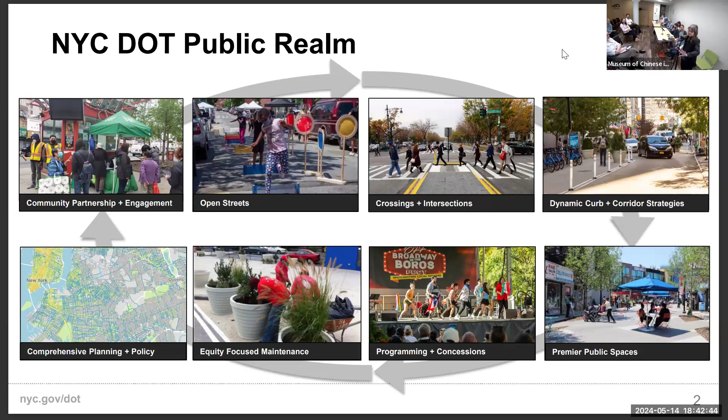Okay, sorry. Can I go like this? Okay, sorry, I need visual cues. So just to summarize, this is some of the types of projects that we work on, again, like quick one-day pop-up plazas to more permanent capitally built-out projects. If you can go to the next slide, please.

Just to review and summarize what Gigi was saying, this SIP is an expense funded project. It is with near-term materials, interim materials like gravel, delineators, etc. This is part of unifying Park Row's connection to Chinatown, but again, these are still near-term materials. Thanks, and then I'll hand it over to you, Becky.

Can I actually borrow one of the mics so that I can move? Sure. Thank you.

Hello everyone, thank you for having us today. We are excited to present our proposal for Park Row. Park Row, as you all know, is an important connector between Lower Manhattan and Chinatown. As you can see in the graphic, there are many visitors, 14 million visitors, and also a lot more in Chinatown.

25.6 million in Chinatown, and we also have a lot of visitors crossing the Brooklyn Bridge. It's very important to improve Park Row as this pedestrian and bike route connecting the different neighborhoods in the area. Another objective of this project is to facilitate easier pedestrian access to streets and amenities within the security zone. As you know, there's the Brooklyn Bridge Arches and a high school and residential buildings within the security zone, and we want to make them more accessible through our project.

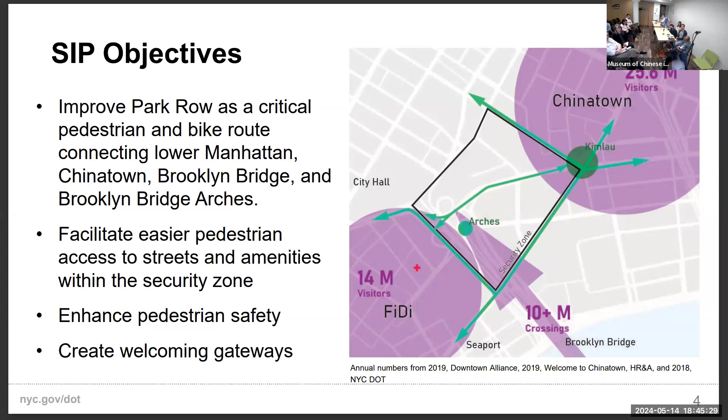This slide is a SIP toolkit, and again, we want to communicate that this is a temporary project using interim materials. For example, when we want to shorten crossings or expand pedestrian space, we use curb extensions. In this picture, the curb extension is in paint, but sometimes we can build it out in concrete depending on conditions. This kind of treatment improves the pedestrian experience and safety.

We will also be using wayfinding signs throughout the project to help people navigate through Park Row. This picture shows you some security infrastructure like bollards. We will not be able to move any bollards in the project, but we will be working with PD to reorganize French barricades and concrete blocks, etc. We will be adding bike lanes and using edge objects to keep our pedestrian space clear and to keep cars out of the painted pedestrian space.

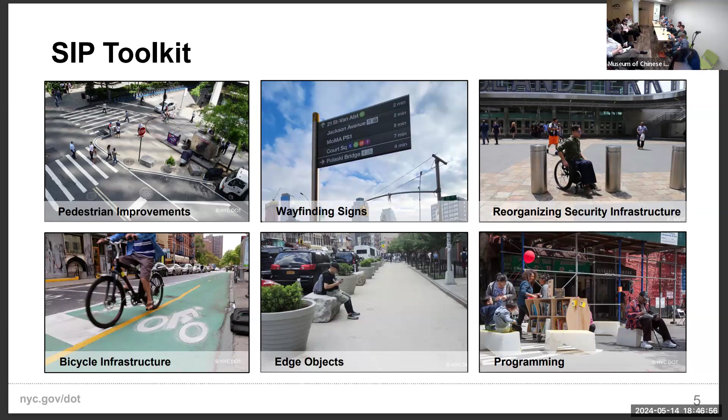This is a map showing the scope of our project. We are looking at the area bounded by Park Row, St. James Place, Pearl Street, and Frankfort Street, the triangle area.

As you all know, Park Row was closed after 9/11. There are 5 bus lines serving the area, and we are also very close to the 4, 5, 6, J, Z subway lines.

These are all pedestrian generators in the area. There are many residential buildings, educational institutions, and civic institutions nearby, as well as tourist attractions such as the Brooklyn Bridge and Chinatown in the neighborhood. There's also New York Presbyterian Lower Manhattan Hospital. All these institutions make this area heavily used, with a lot of stakeholders and interests we are coordinating with.

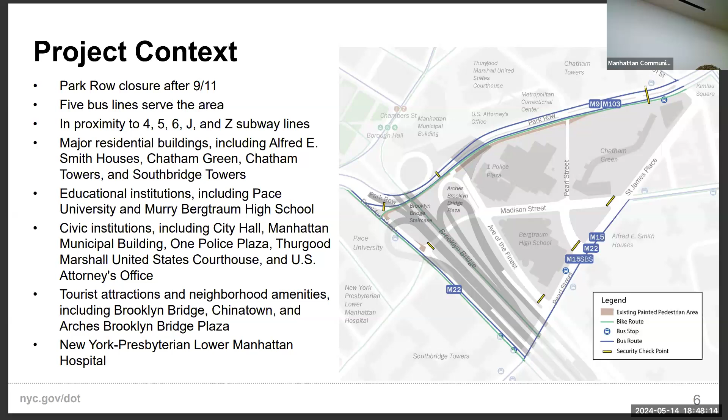This map shows the crash injuries within the 5-year period between 2019 and 2023. As you can see, the most injuries occurred on St. James Place and Pearl Street, because these are full regular traffic compared to within the security zone, which is more closed and has fewer injuries.

A highlight for us is that Avenue of the Finest and Pearl Street has the most injuries, and we are proposing treatments to improve safety there. We also want to highlight there were 2 severe injuries, 1 pedestrian and 1 bicyclist, which demonstrates the need for us to improve pedestrian and bike safety.

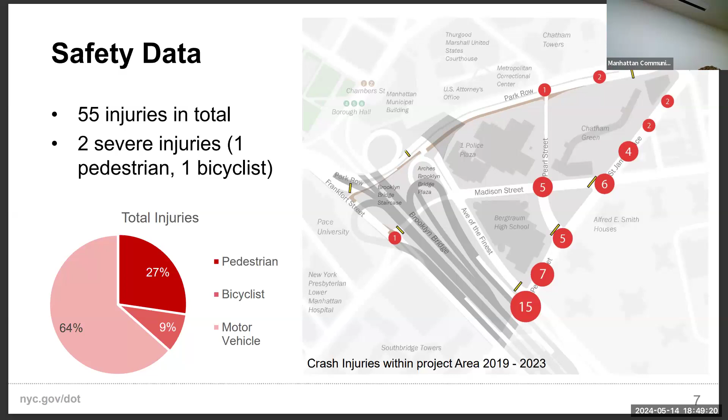To summarize the recent outreach for the project: in summer last year, the Chinatown Connections project had virtual and in-person workshops that got feedback for the larger project. Through that process, we learned there was general consensus for bike and pedestrian improvements on Park Row and around the security zone area.

For the street improvement project specifically, we did 2 in-person workshops on April 17th and May 4th to present the proposed design and get people's feedback. Through those workshops, we learned that participants generally supported the proposed improvements that make the area safer and more accessible. We also heard a lot of requests to address the conflicts between bikes and pedestrians.

People are also very interested in the Pearl/Oswego design, which is not within the SIP scope, but we heard that people are interested to learn more updates.

Now we will look at the existing conditions of the project. On this map, the dark khaki color represents the existing painted pedestrian space. The thick green lines are the 2-way bike lane, and the thinner green lines are the 1-way bike lane. The dark blue dots represent the existing wayfinding signs.

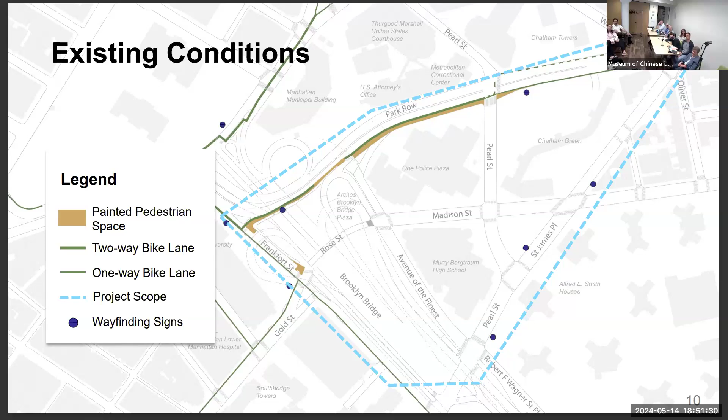At Pearl Street and Park Row, there were also a lot of PD cars parked in the bike lane and pedestrian space. We heard that it has been improved recently, but in our design we will have a more permanent improvement to organize this area.

On Frankfort Street, there is a sidewalk on the north next to the fences, and if you walk there you know it's very narrow. There are a lot of parked cars intruding on the sidewalk, and Brooklyn Bridge columns in the middle of the sidewalk, making it very hard to navigate through. This is also something we would like to address in our project.

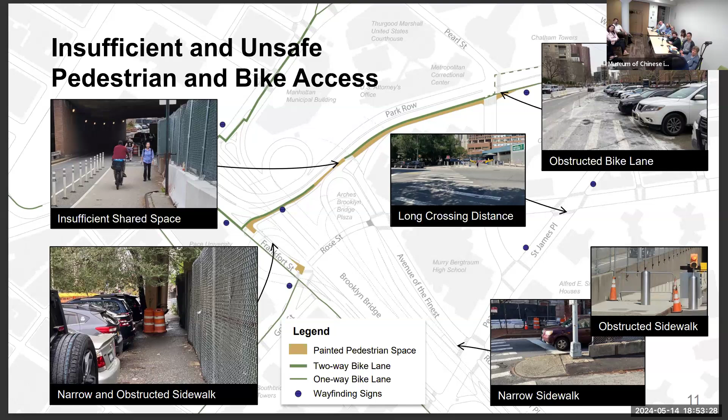On St. James Place, there are many long crossings, and at Avenue of the Finest there is insufficient sidewalk width, with barricades also being used to block the sidewalk. It's also very confusing to navigate through the area.

Although we have some existing wayfinding signs, if you stand at the entrance of Park Row at Frankfort, this is what you see. There is also a wayfinding sign pointing to the Brooklyn Bridge staircase, but it's so dark and very small that it's not serving its purpose.

On Park Row, it's a very long walk without any directions. Also, at Madison Street and Avenue of the Finest, there is a staircase going up to One Police Plaza and to the municipal building, but there's no signage here, and it's a very small entrance, making it hard for people to find it.

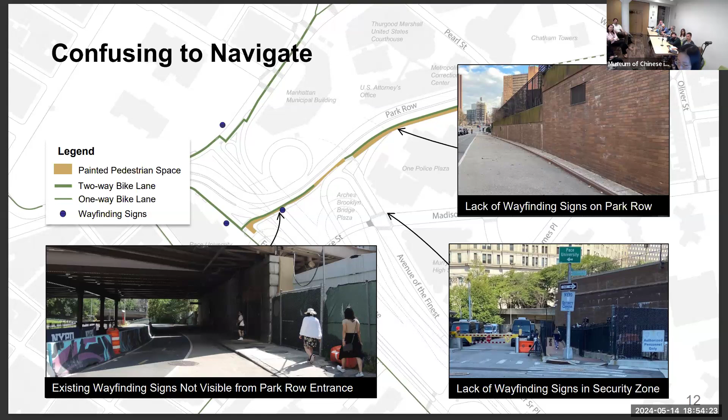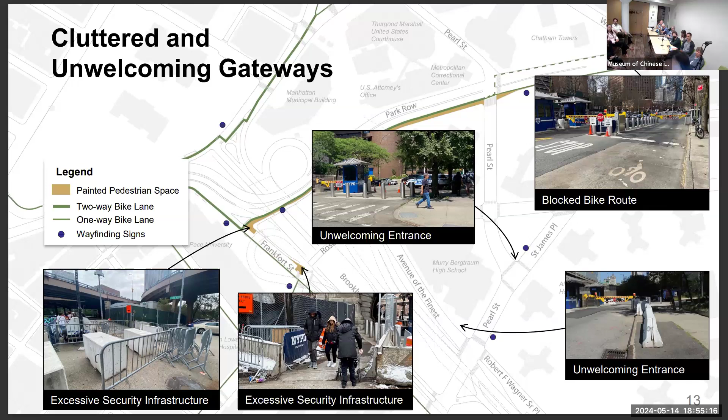And lastly, the gateways to the security zone are cluttered and unwelcoming. At the entrance of Park Row and Frankfort, and Rose and Frankfort, there's existing security infrastructure, barricades, sugar cubes that make it very unpleasant for people to use the entrance. On the Park Row and Worth side, there's an existing bike route supposed to go through on the north curb, but it's obstructed by the security gate, so this bike route is not usable right now. And again, there's an unwelcoming entrance on St. James and Avenue of the Finest as well.

So next we will present our proposal to address all the issues we identified before. This map shows you the proposed interventions in this area. The orange color represents the proposed painted pedestrian space, blue is the proposed concrete, the bright green represents the new bike lane or upgraded bike lane, and the red dots are the new signs.

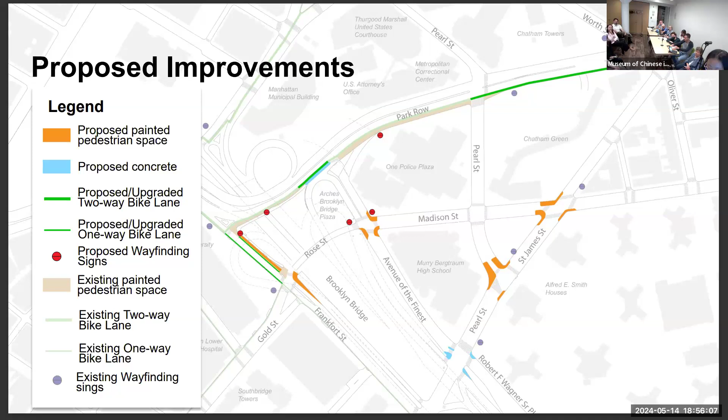I will go over each intersection to introduce the proposed changes. Before we go to the intersections, we are also utilizing the DOT-funded art program to make the gateways more inviting and welcoming. The art program will commission site-specific temporary art projects on up to 4 proposed sites. The RFQ to select artists was live between April 9th and May 5th, and we received 165 submissions. The artist selection process will be a multi-stage process, including internal DOT units and external stakeholders.

Eventually the artists will be matched with the sites, and we will conduct community engagements for the artists to come up with a design. Implementation is expected in late summer and fall.

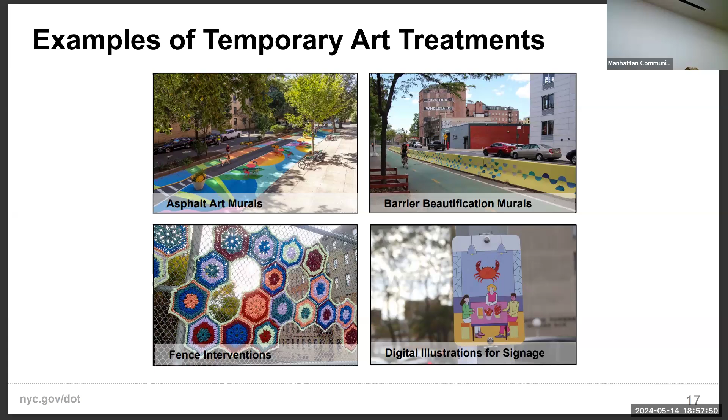These are some examples of potential art treatments for the project. You might be familiar with asphalt art, which you've seen in the city. There's also barrier beautification, already present on Park Row, and there's a chance we can renew some of it. There's also fence interventions and digital illustration for signage.

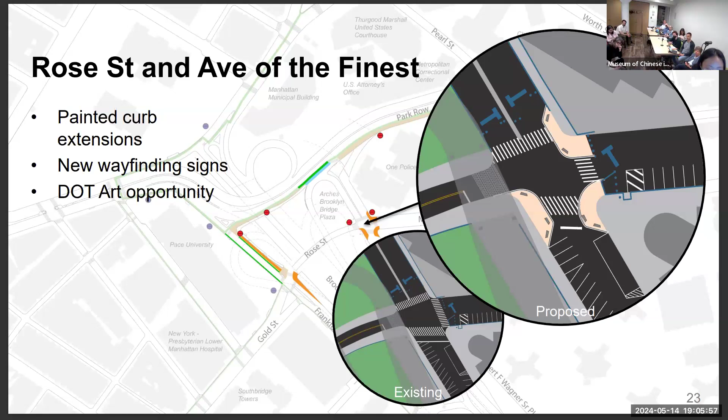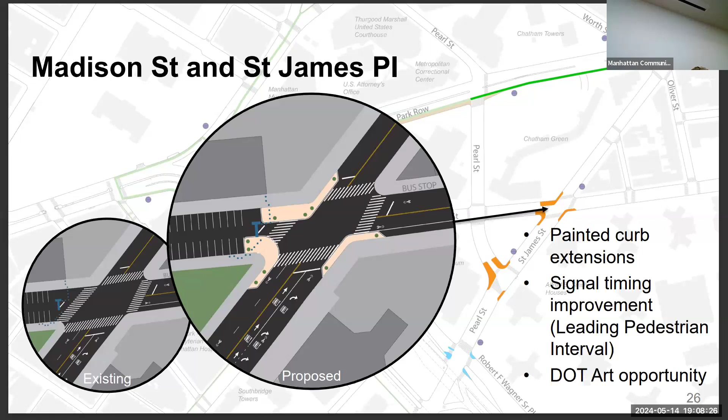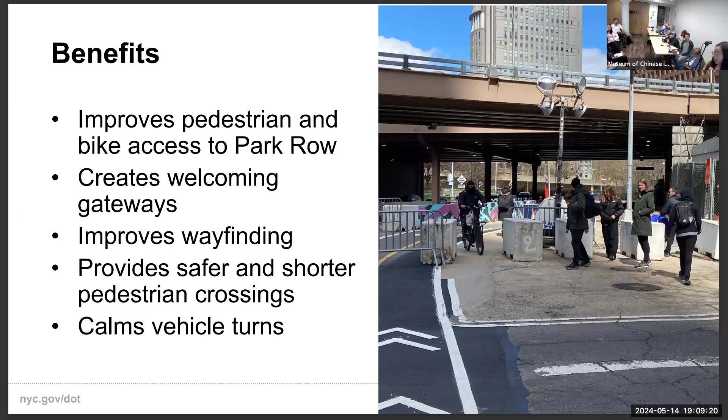Overall, this proposal will provide a lot of benefits. It will improve pedestrian and bike access to Park Row by removing barriers like the French barricades and parked vehicles. It will create welcoming gateways, for example through DOT art interventions, and improve wayfinding by adding more visible signs throughout the area. It will also provide safer and shorter pedestrian crossings through the curb extensions we discussed, which help calm vehicle turns and improve safety of the intersection for all street users.

For the implementation, we are aiming to start concrete work, markings, and sign installation in summer 2024. But we may have a second phase of implementation in 2025, especially for this pinch point we just talked about, because it's right next to a bridge off-ramp. There are more technical details we need to go through, so this might push this part of the project into next year. For DOT art, the design and engagement will happen in early summer this year, and implementation will be in late summer and fall this year.

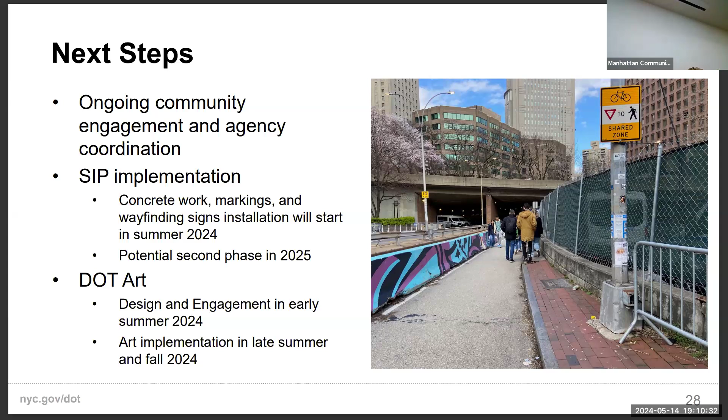And that is the end of the presentation. Happy to take any questions you may have. That's great.

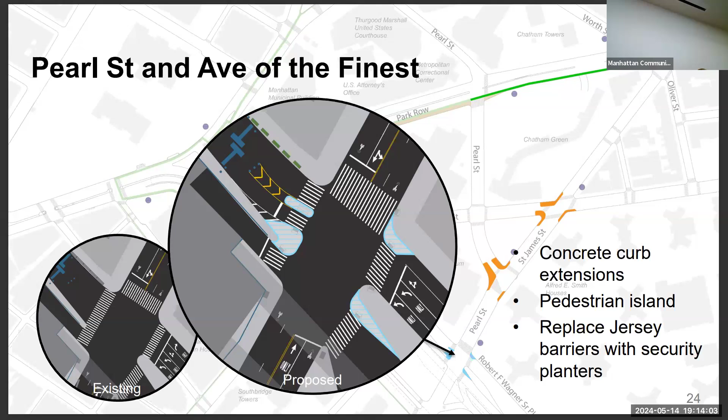So, I love all of the short-term improvements that you provided here. I have a couple of questions related to it, and then a comment about the longer term. In terms of the added NYPD parking, you're going to get questions and potential pushback, even though I think it's really reorganizing, so we may have to explain that. My one question related to the cars on Park Row is we've talked about the east side on the Chatham Green side, but I was wondering about the parked cars on the west side, the Chatham Tower side, if there's any way to potentially alleviate the congestion in terms of the number of cars parked there. That's one question, but I'll pause.

I can first respond to the added parking spaces on Park Row, that's the slide we're talking about. We did take away a lot of parking from Frankfort Street, and for the pinch point they also have parked cars on the red, so we're removing 4 of them. In working with PD, we would like to have a good relationship with them and also recognize their needs and provide what we can. For the parking spaces here, it doesn't encroach on the bike lane itself—we use the channelization, the striped space next to the median, to create the bike lane and the parking spaces. So it's not taking away any pedestrian or bike space. I think this is a good solution to satisfy the needs of multiple stakeholders, and the parked cars also protect bikers because it's not right next to moving traffic.

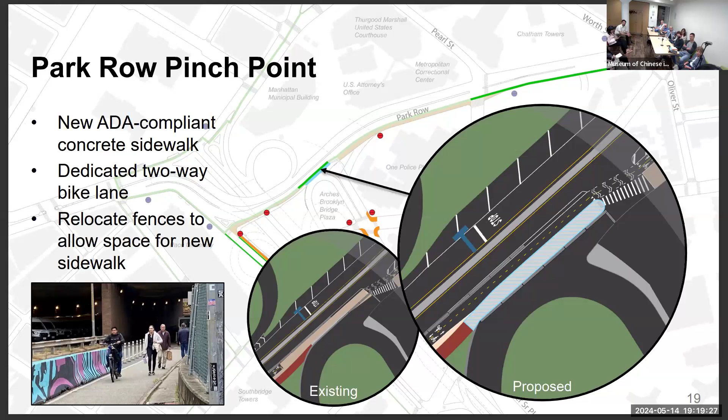My question is about the painted curb extensions. I think I expressed this during the engagement - we have a lot of problems in our district with vehicles not respecting painted curb extensions and daylighting. We just passed a daylighting resolution last month asking for physical barriers and clear signage at any of these types of painted gravelly stuff that we're using so often now. I know you mentioned there would be some, but will there be some everywhere?

I see like some. Yeah, we put edge objects wherever possible, and as you can see, we don't want to put barriers in the middle of the pedestrian paths, meaning when people cross using the crosswalk, we want to keep that space clear so pedestrians can use it. But next to the crosswalk, we can do our usual granite blocks to keep cars away from the space. I'll just say that the daylighting on Grand Street near Suffolk and Norfolk - cars use those open spaces as an invitation to pull in.

I guess it'll probably be less of a problem here, just because there are fewer vehicles going through this area, but especially on Frankfort Street it might be a problem if there isn't a ton. And I know we're going to talk about this, but it doesn't really make sense to me why you don't paint the crosswalk all the way to the actual curb, because cars just don't see that as a crosswalk then, even though it effectively is.

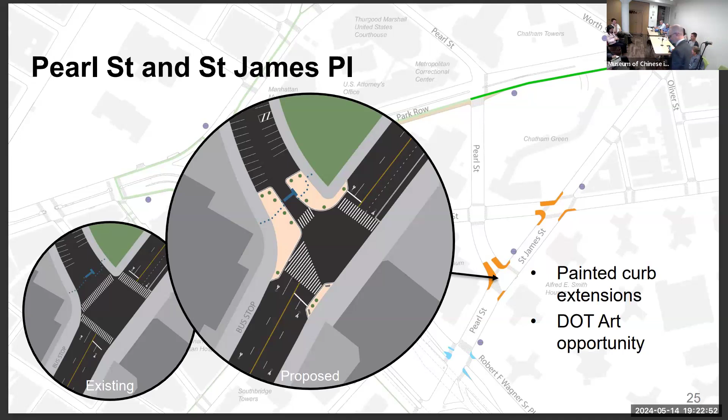Okay, thanks again. I echo what Nancy said, she said it so eloquently. I know you've been working really hard on this. I just have a few questions myself.

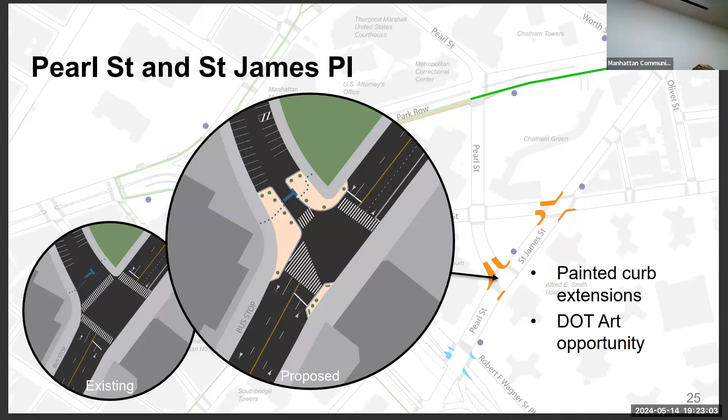Can you clarify the funding? I know the larger Kim Lau Plaza is the capital project, about 55 million. But then there was that $4 million, and I'm just trying to understand, with the SIP, what money are we spending for this work?

So is the $4 million now part of the Kim Lau area, or is the $4 million like seed money for a future capital project for Park Row?

The $4 million capital allocation, which is from the state, there will be a separate engagement process on how to spend that money for capital projects. We want to start this first because it's short term, and we wanted to start it as quickly as possible. There will be a separate process on how to spend that $4 million capital.

Awesome, okay, well we look forward to that. That's fantastic. And then just a couple of little things here.

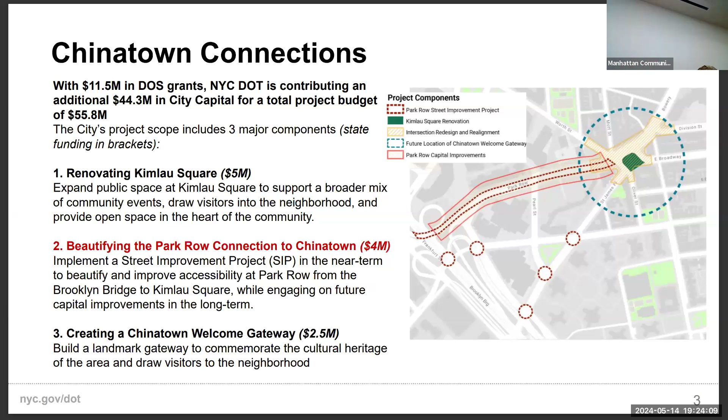Park Row and Frankfort—I'm wondering, is there a reason why the two-way bike lane on Park Row isn't painted green? Is that just standard if it's between two pedestrian areas? As we talk about making this more welcoming, making Park Row look pedestrian-friendly rather than like police department or comptroller parking, but if that bike lane looks so vehicle-oriented—maybe that's just graphically—I'm just wondering about the thought process.

You mean the southbound, the two-way Park Row bike lane as it hits Frankfort? So...

Green paint is expensive. We're trying different colors and trying to find ways to limit the use of green to where it's needed most. Much of the Park Row bike lane is fairly separated from moving vehicles, especially inside the security zone—there's not much going on in there. So at most, what we could propose would be a gateway treatment, which is basically 50 feet of green right at the entrance, then it turns back to asphalt. We're starting to implement that in various locations throughout the city, but the old stuff is still there, so it's sort of grandfathered in. We're trying to find ways to be more budget conscious and still get the same impact.

Sure, that makes sense. Yeah, I'd be for the gateway treatment, that sounds great. And then again, the bike lane along Park Row, is that going to be protected?

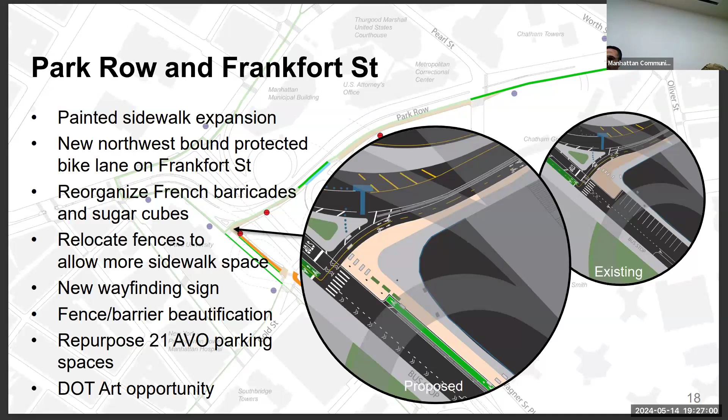I know, I'm sorry. The island in front of the pizza place, I'm just letting you know there's a lot of concern about it. I have to remind people there's already a crosswalk, there's a light there, people should be crossing anyway. But you're gonna get some pushback on that, just letting you know.

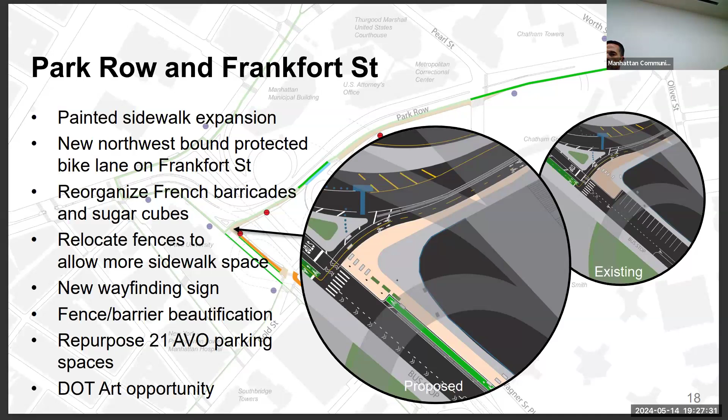Related to the bike lanes, because Vinny just reminded me, now you're adding the two-way on Park Row from Kimlau to Pearl. The motorized bikes speed, so if there's a way to potentially slow it down for people crossing near Park or at Pearl and Park Row, that would be helpful. Thank you.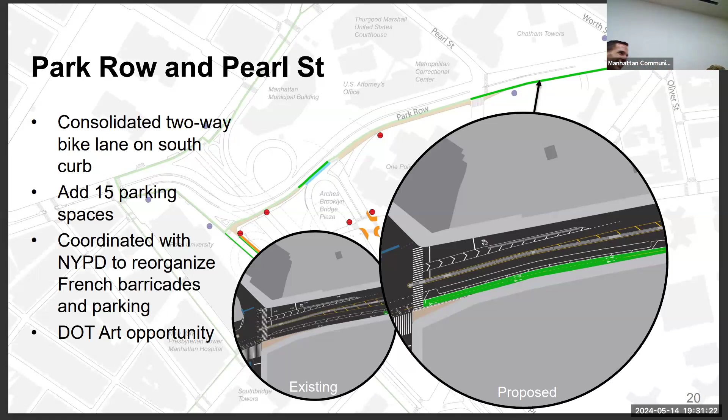So there are these painted sidewalk extensions in the corner, and you said they're temporary. So is the intention to put it in the next capital funding, or will it be there forever? Or is it seen as just a test to see if it really works? Because I think if you really want a sidewalk, if you don't want cars to go there, then you build a sidewalk out, and they will never go there if they can't.

So you hit it on the head, it's all of the above. The idea is we love doing the paint so that way we can make sure it does work, and if it needs to be adjusted, we can adjust it. It's much cheaper to adjust this than it is to adjust concrete or something more permanent. And then, if we all like it, we would come back. It is intended, anytime we put down that sort of beige temporary material, we are obligated to start the process for capital funding, seeking the capital funding, designing the capital project, and then eventually 10 to 20 years down the road, actually building it.

So yes, to all things. And in 20 years? Well, you never know. That's for... Hopefully not, but you know, there's a lot more people involved in this room.

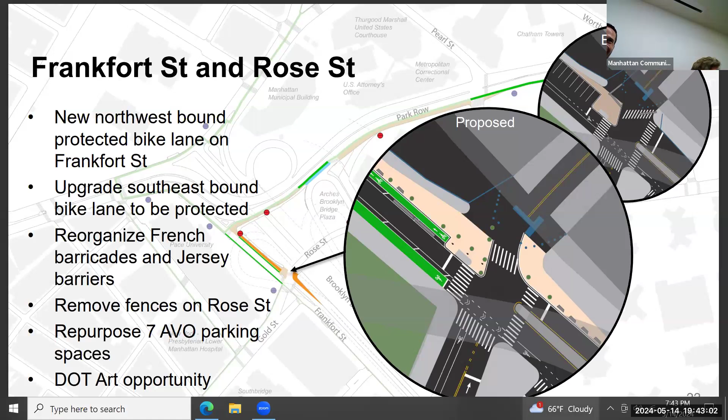So we have our second agenda item, which is a request that DOT perform a pedestrian safety study for the intersection at 10th Street and Avenue C. And Juliet, I believe you're next, thanks, please come on up if you're okay, and you can use the microphone here. You could, yeah, Juliet, you can, want to sit? Or you can take mine, whatever you want to do. Okay.

Hi, Dr. Wong, you must be Susan. Yes, nice to meet you. If you could come here so they can see you on camera, that way they'll see you at home.

My name is Juliette Michelli, and I'm here because I'm a friend of Merle Ratner, who was killed on February 5th while crossing the intersection of Avenue C and 10th Street. She was struck by a tow truck that was making a left going down Avenue C and turning onto 10th Street. A pedestrian was also there. She was crossing with the light. She had picked up takeout food from Ayat Restaurant on 7th Street and Avenue C, and was on her way to my apartment at 14th and B to have dinner together, as we often do.

For anybody who wants to know, last week the tow truck driver, who claimed he didn't see Merle, pled guilty to failure to yield right of way to a pedestrian and failure to exercise due care causing serious physical injury, both misdemeanors. He'll pay a $750 fine, take a one-day class on safe driving, and have his license suspended for 6 months. Seems kind of disproportionate.

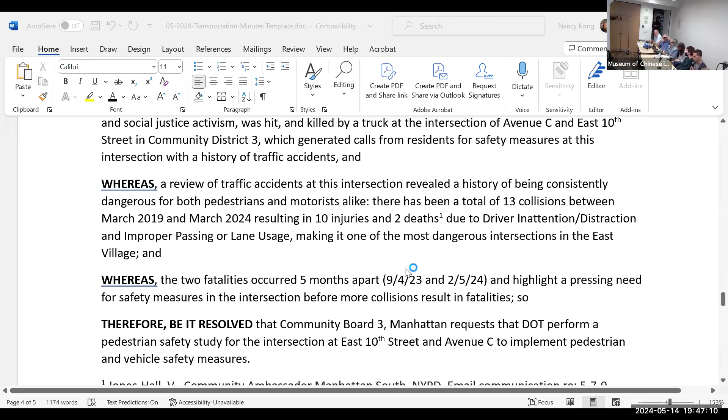Now I'm blind, so I'm gonna have to read it from... okay, I can't, I'm looking at this. Do you want to, maybe I'll just go through and read it out loud, if it's okay with everyone here?

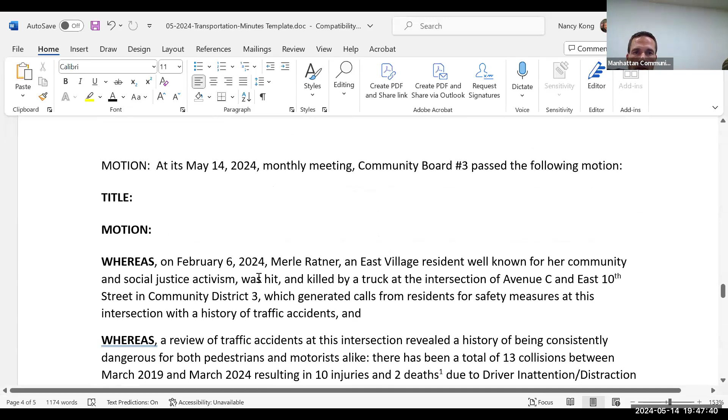Whereas on February 6th, 2024, Merle Ratner, an East Village resident well known for her community and social justice activism, was hit and killed by a truck at the intersection of Avenue C and East 10th Street in Community District 3, which generated calls from residents for safety measures at this intersection with a history of traffic accidents.

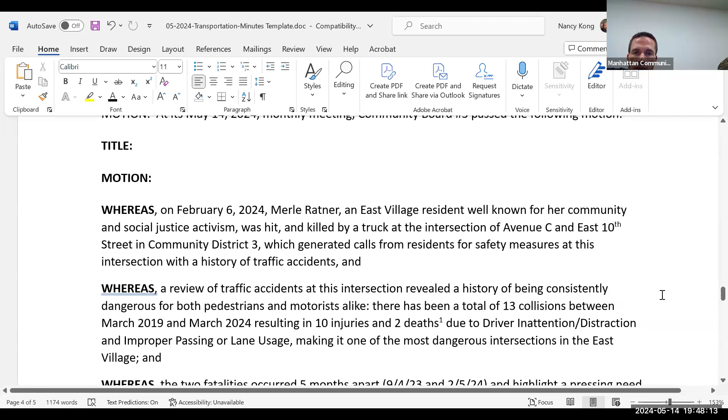And whereas a review of traffic accidents at this intersection revealed a history of being consistently dangerous for both pedestrians and motorists alike. There's been a total of 13 between March 2019 and March 2024, resulting in 10 injuries and 2 deaths due to driver inattention, distraction, and improper passing or lane usage, making it one of the most dangerous intersections in the East Village. And whereas the 2 fatalities occurred 5 months apart, 9/4/23 and 2/5/24, highlighting a pressing need for safety measures at the intersection before more collisions result in fatalities.

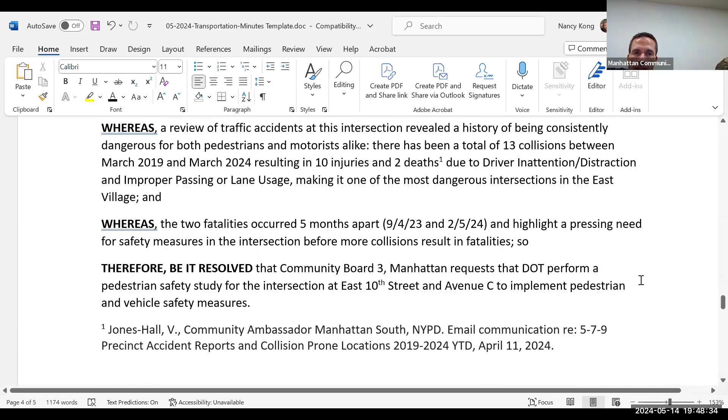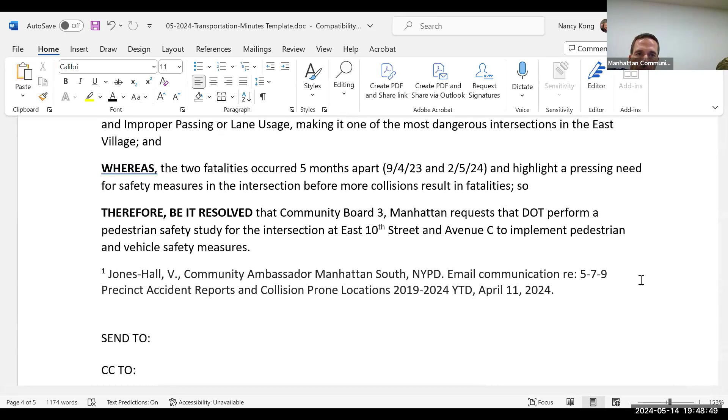Therefore, be it resolved that Community Board 3, Manhattan requests the DOT perform a pedestrian safety study for the intersection of East 10th Street and Avenue C to implement pedestrian and vehicle safety measures. And then we have a citation for the second whereas.

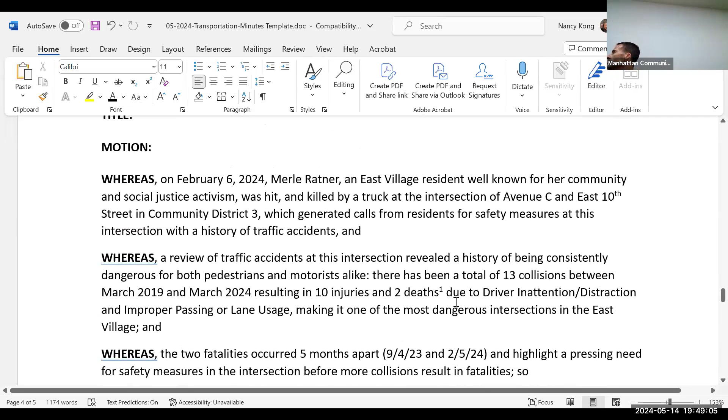I would actually add a description of the truck. It's a tow truck. Tow trucks have a history of hitting and killing people in New York City over quite a period of time, so it's not just any truck. Yeah, that sounds good.

Oh, where did the mic go? Oh, sorry, we're hogging them. I'm taking them.

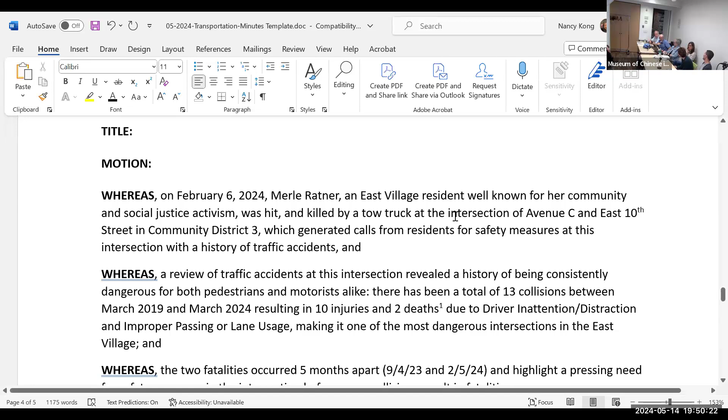Decades ago, they ripped out the top block of the buildings to reorganize the streets very well. It's an irregular street geometry at that location.

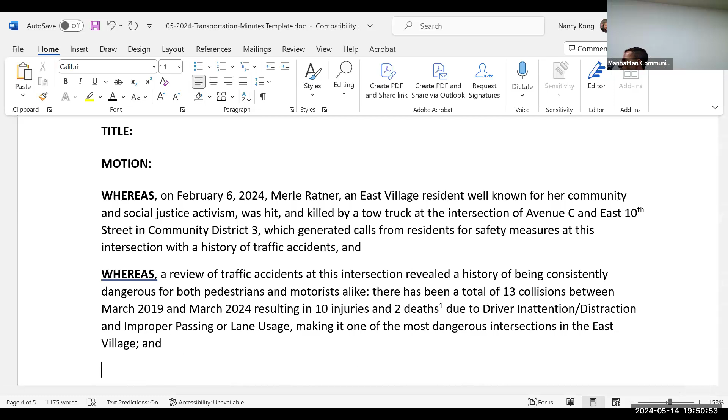So do you think that's a separate whereas, or do you want to just include it in the first one? Separate whereas? Maybe the further whereas would be a good place for it. It's like an off-center intersection, like the curb lines don't really align. Center line is also not centered. So maybe if we did the study, but it would help to emphasize whereas this intersection is.

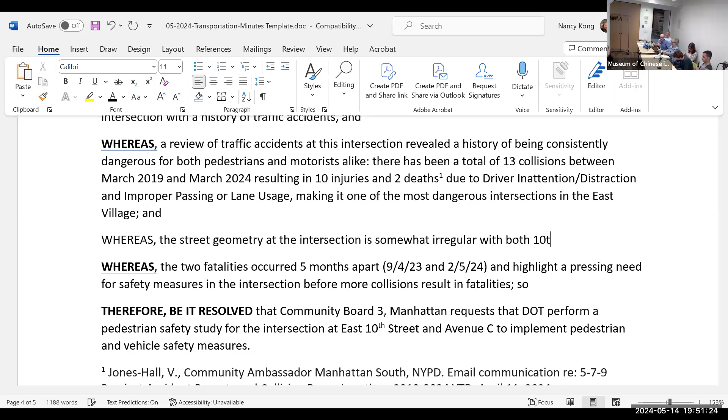So this is irregular. I could go on, but I don't know for a fact because. Should we take up someone, just say this? Yeah, yes.

First of all, I'm so sorry about losing your friend. That's really horrifying. I wish something had been done sooner. I apologize for that. I was just wondering if we should add in a little bit more specificity about how this was, if that makes sense. I think this is now.

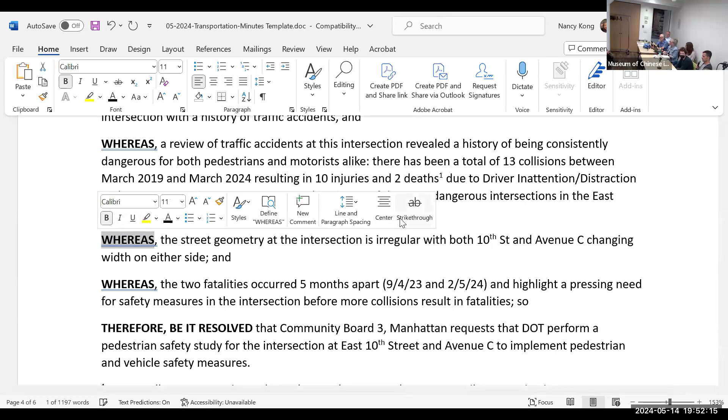Killed by a tow truck at the intersection of Avenue C and East, and maybe we should say it was turning, a southbound tow truck. I just don't remember exactly.

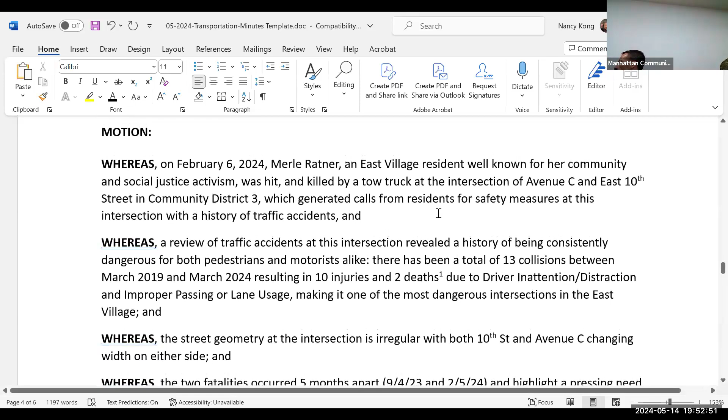I'm wondering if, because this is one fatality, there was another fatality, and then there were other accidents, so I'm wondering if we want to add, because I like what you're saying, DOT looking at police reports and incident reports and incorporating that into the study. So we just gotta get the whole, I don't know if both fatalities were the same instance in corner.

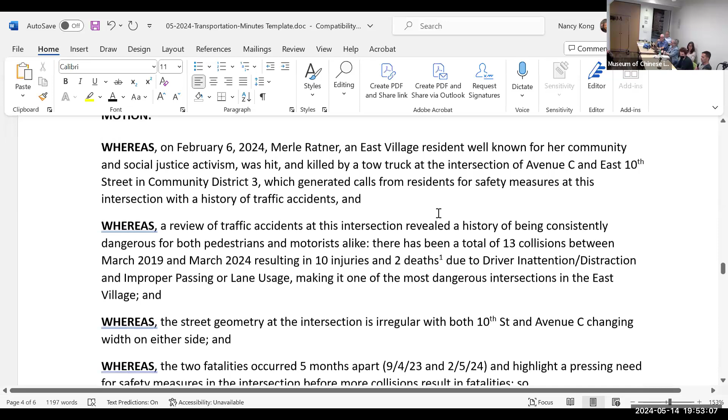I would say whatever the reason is for the accident, that intersection is making it much easier to have the accident. I was just wondering if it would make sense to situate where she was in the intersection where the truck was turning. Like it was going southbound for the truck? Yeah, I have the police one.

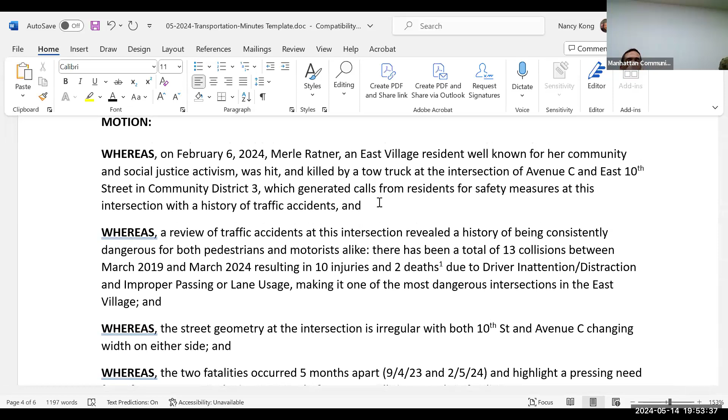So that potentially limits their study. Yeah, we don't want to limit the study. Well, I just in terms of, would it be helpful for them to have the details in front of them? They should have it. We got all this from the police. Okay, well, will DOT have it? Yes, well that's what I was wondering, like, under there.

So that, onto the therefore, like, when we say, you know, do a study, maybe based on police reports of the various incidents, or the many incidents. They definitely have all this. Shaking your head, we do have to. Great. Thank you.

It's gonna show people what, so that it actually painted dotted lines down the middle of the intersection, so the cars can sort of visualize where they're supposed to be. Oh yes, you know, so that's how they describe. Maybe it was, could add to that.

Could add the bike lanes, the bike striping is almost more confusing than anything. Not in the middle of the intersection. Yeah, that's just a mess. I like that. So you can have that.

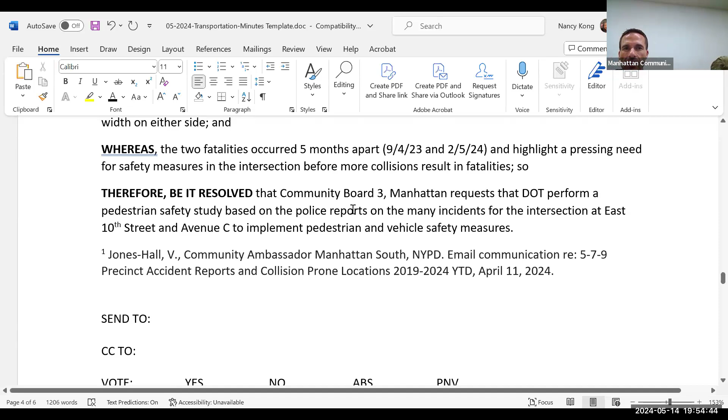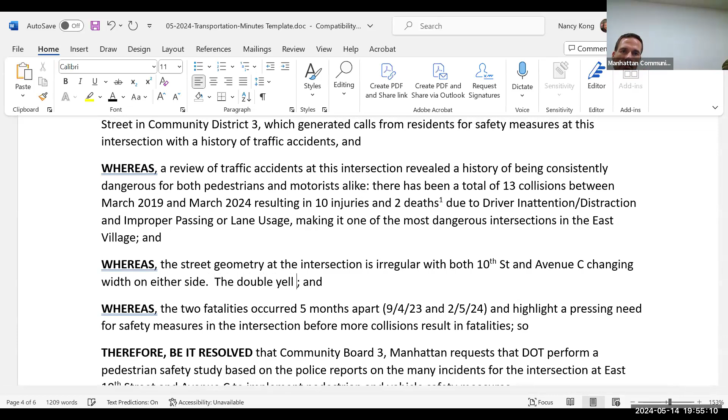With on either side paragraph. You could say that the 10th Street. Right, and after then, oh and then the geometry. Center lines do not. Inside, maybe part of this whereas. Yeah, I think part of that whereas where the street geometry at the intersection is irregular and multiple on-street striping. The double yellow lines do not line up as you pass the intersection. It says the yellow lines.

DOT has painted dash lines to help cars visualize where their lane is. DOT has painted dash lines through the intersection to help vehicles, or drivers, visualize where their lane is going. Once they look at it, they realize, oh yeah. You can save some money on that striping, probably. It's not really.

Do you want to, where the end is, take away the period and lowercase the a? Just make that one sentence: the double yellow line does not line up as you pass the intersection. And, yeah.

Is it vehicles and bicycles? Oh, it's both. All lanes are straight up, so you can say the yellow division has dashed lines. It's really very complicated. And there's a double-wide bus stop, so the buses are turning too.

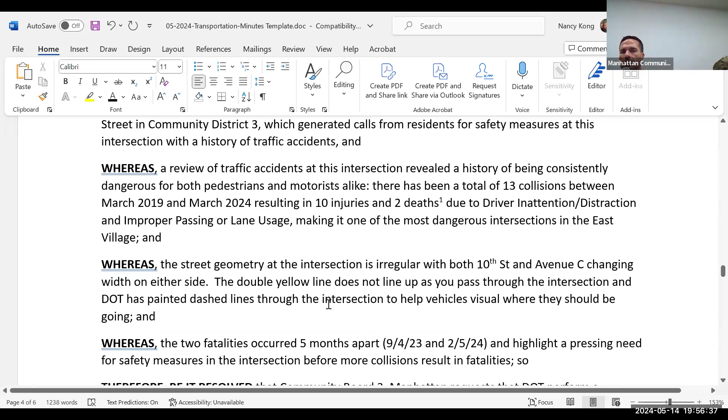Yeah, so I think, Nancy, before where you have the intersection, to help vehicles and bicycles, maybe say vehicles, buses, and bicycles. Get it all in there.

Under that, whereas we were just working on the last sentence. Yeah, right there. And it's what, visualize? Yeah. That's... Going once?

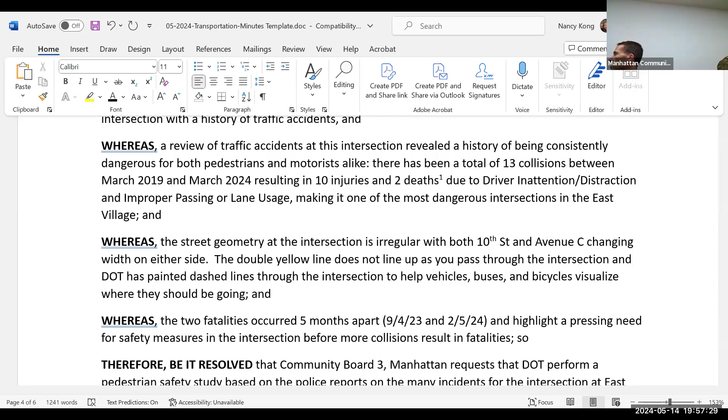You worked out that the study is the right thing to ask for. It's not the same, though. Let's ask Kate. I think the way you'd phrase asking for a safety study would be either able to do that.

For this intersection right now, we're actually already looking at studying it for a leading pedestrian interval. So I think the general language you have here works, and once we receive the resolution, we'll see if there are any additional studies for improvements we can make.

Okay, all right, so should we do a little vote here? Everybody, do we have to go through or just...?

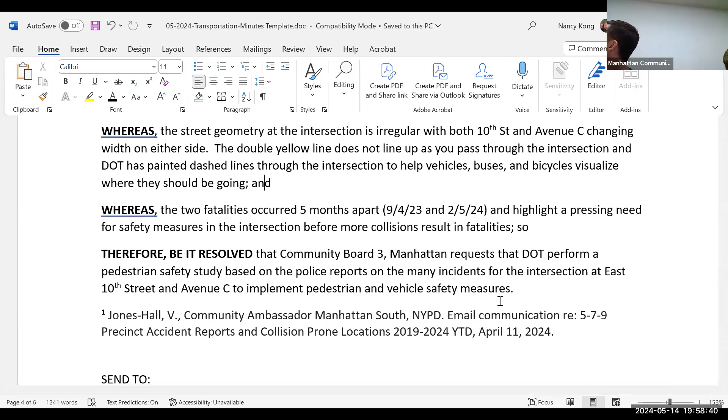Generally call it. Let's go, okay, Lee. Yes. Yes. And then Jolene's absent. Is that her name? Oh, Jolene is absent. Sean is absent. Okay, all right, thank you.

And thank you, Julia, yes. Thank you, Julia. Condolences to you and really appreciate your advocacy. Thanks for being here. Yeah, thank you.

All right, our next order of business is Lower East Side Ecology Center, and I believe we have Christine here tonight to speak on behalf of that organization. Are you okay using a microphone, or would you like one of these? Okay, great. Thank you for putting this issue on the agenda.

I'm here to talk on behalf of community-based composting in New York City. We are part of that. We started it here in the Lower East Side in 1990. You're probably aware of the PEGs that happened last year in November, which eliminated this program that the city has invested over 30 years in. Lower East Side was, in a way, the birthplace of all of that.

It's a very important program because it really addresses climate change and allows people to take action and do something positive with their waste. To explain what community-based composting is: it's collecting food scraps from people, turning it into soil amendment, and then using that soil amendment right here in the neighborhood, providing free compost to community gardens, using the material for street tree care, and also providing it to the Parks Department.

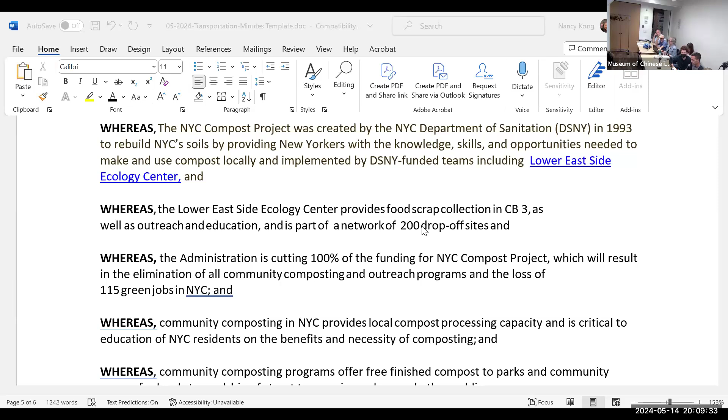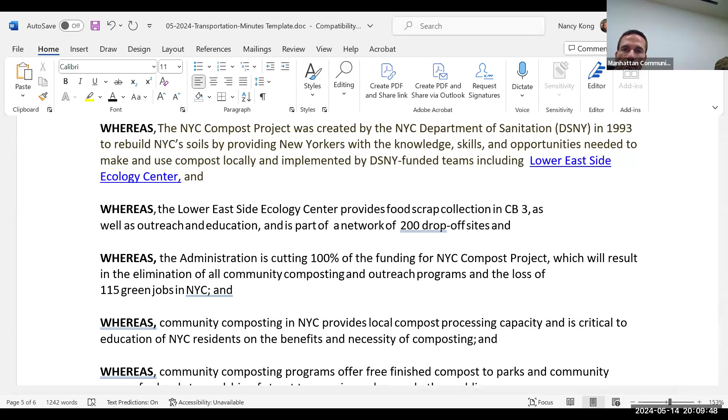Whereas the New York City Compost Project was created by the New York City Department of Sanitation in 1993 to rebuild New York City soils by providing New Yorkers with the knowledge, skills, and opportunities needed to make and use compost locally, and implemented by DSNY funded teams including Lower East Side Ecology Center. And whereas the Lower East Side Ecology Center provides food scrap collection in CB3, as well as outreach and education, and is part of a network of 200 drop-off sites. And whereas the administration is cutting 100% of the funding for New York City Compost Project, which will result in the elimination of all community composting and outreach programs and the loss of 115 green jobs in NYC.

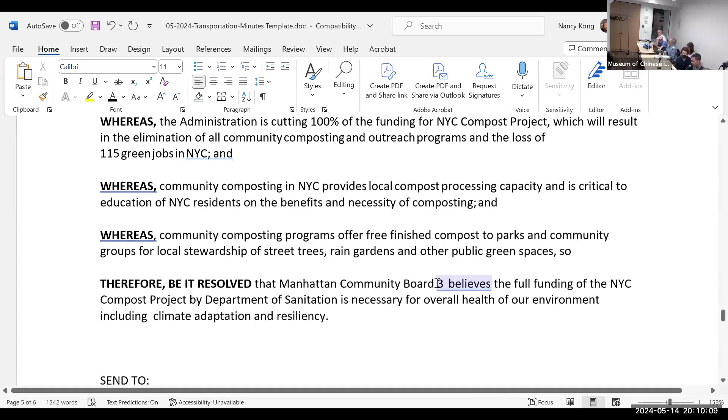And whereas community composting in New York City provides local compost processing capacity and is critical to education of New York City residents on the benefits and necessity of composting. And whereas community composting programs offer free finished compost to parks and community groups for local stewardship of street trees, rain gardens, and other public green spaces. Therefore, be it resolved that Manhattan Community Board 3 believes the full funding of the New York City Compost Project by the Department of Sanitation is necessary for the overall health of our environment, including climate adaptation and resilience.

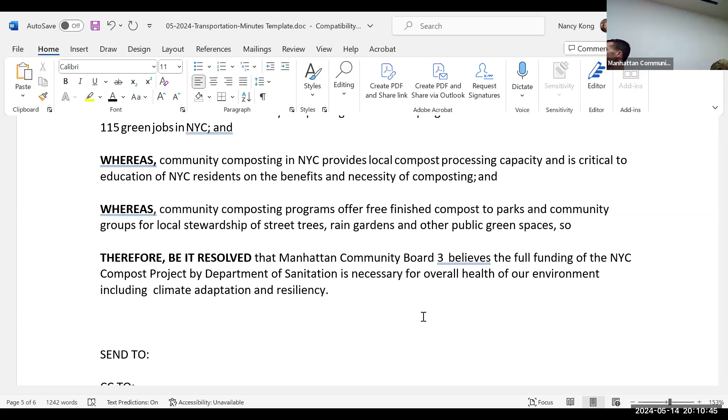So one of the whereas clauses remarkably stated - this is the one now on top - whereas they are cutting... does the administration have that power, or is it the legislature? The administration is cutting it itself, and it's effective, they have done it, it's not part of the budget process. They're going through the budget right now for July 1st, so this is the mayor's proposal for the budget. Is it the mayor's proposal for the budget at the beginning of the cycle? Yes, sanitation is cutting the program, they're cutting out the program.

Then should we say perhaps the administration, as proposed, has cut 100%? They are doing it for July 1st, so it is starting July 1st. That's correct, right, Christine? Yes, we're advocating for the FY25 budget, so starting July 1st.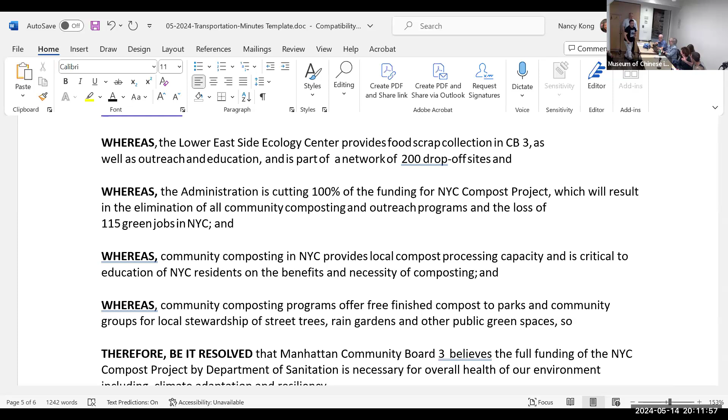So we're advocating for July 1st. It makes sense then what you remember. Well, I wonder, should we just be specific, like where it's the executive budget right now, because it hasn't been passed? So should we say whereas the executive budget is proposing cutting 100%? That's what I did, yeah, we can. That's a good comment, David. Most people know what that means, but it's true. But it's true, right?

Because I don't know, do we actually say we want to put it into the final budget? I think that's the last line. Is it the last line? Look at the last line. Yeah, we want full funding. Full funding - maybe we should say in fiscal year 25 and beyond.

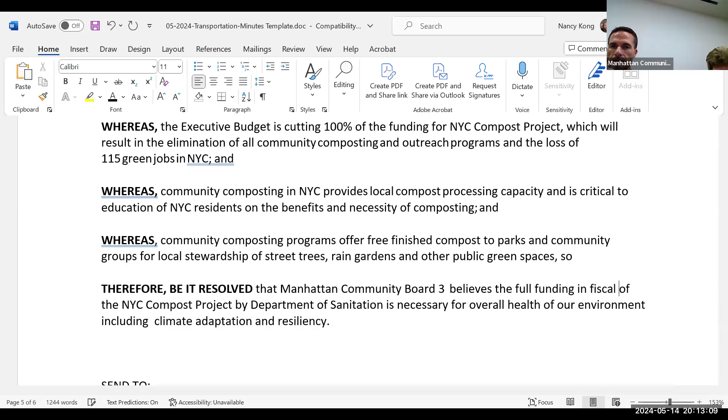So who is this being sent to? City council, because they actually write the budget and revise executive orders. The next step after it's adopted, it goes to city council and then it's the adopted budget. So is it the city council reps? He's asking, should the council reps be included too, because the city council could fight for this as well. We will send it to them, they will definitely be sent.

Any other comments? All right, let's take a vote.

Start again at the end, please. Yes. David? Yes. And then we had two folks not in attendance, Jaylene and Sean, right? And that's a wrap, yay.